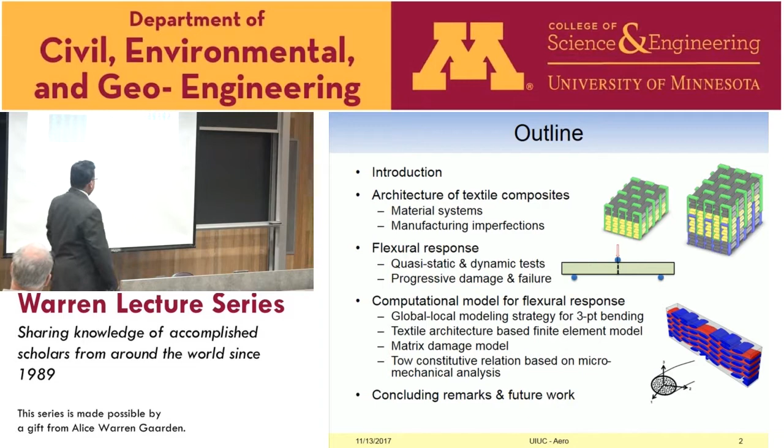These materials have architecture. What I mean by that is that you have length scales varying from meters, which are structural level, all the way down to microns, which are at the microstructure level. So here's just a little snapshot of braided composites - how they're built. They're also manufactured in an automated manner, robotically. So that's another advantage, right? The manufacturing process is more controlled in terms of getting a product that has more precision in the microstructure, the control of it.

So you have yarns that are interwoven in some manner, which you can control depending on the machine you use. And then they are infused with resin under a vacuum, and you get a product which is a structure then. It has the ability to also be manufactured into net shapes. So the shapes that I showed you in the earlier pictures are facilitated by the production of the material as well. So there's some advantages, no connections, etc.

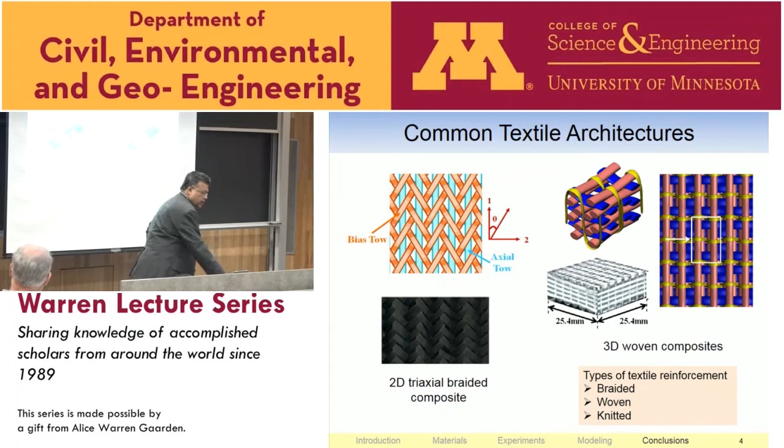And it's an old technology, right? Weaving is one of the oldest technologies. Our jackets, Nike shoes - they're all woven and they're mechanized. So with a bit of imagination and creativity, if you can make a shoe that's size 10, you can make a shoe that's size 100. And so you start thinking of scaling things up, and you can make very large structures quickly. And so as mechanicians, we now have to come up with frameworks to analyze the structure to be able to predict how such a structure would behave.

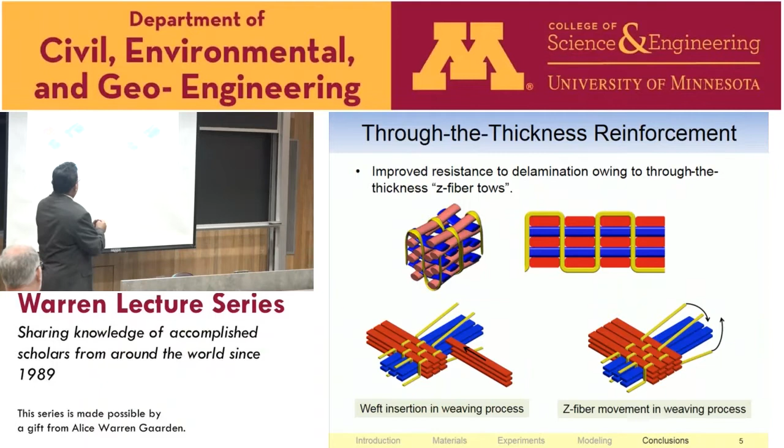So it's a weaving process that I'm showing here as an illustration. And the yarns can be different - you can have glass, Kevlar, carbon. Some are now thinking about ceramics like silicon carbides, etc. as well. And the architecture is controllable.

In this particular type of material, there are yarns that are in plane, if it's a panel, and then there are yarns going out of plane. That's the zigzag, somewhat crushed sinusoidal wave going through, binding all the in-plane yarns together. If you start breaking this up, you'll see different length scales all the way down to the micron scale, with fibers and polymer in between.

Material scientists are interested in manipulating the microstructure even at a decreasing scale. For example, the interface between the fiber and the matrix can also be manipulated. There's a lot of work going on in material sciences and mechanics looking at decreasing length scales, but the disadvantage is that the computational cost increases. You have very good fidelity, but your cost increases.

So there's a balance. You have to understand which scale to start your calculation and which effect you want to measure. There's a trade-off, but I think as time goes on, we will see a day where we incorporate more and more scales in a single analysis as computing power and computing architectures become better.

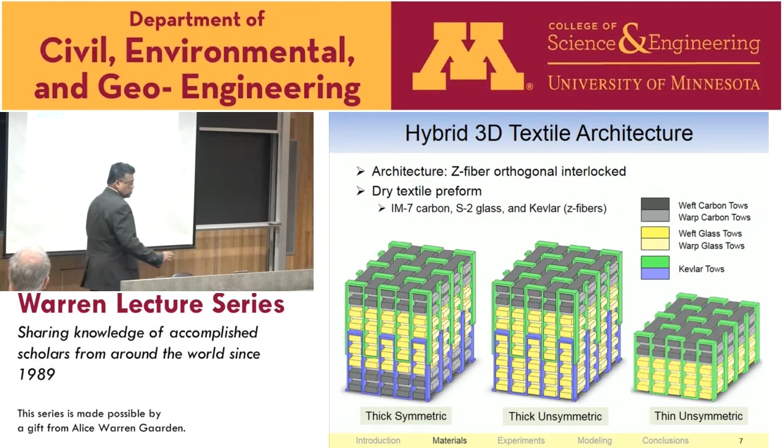This is a depiction of the materials we looked at, and this was for the Army Research Lab. These are the architectures we looked at, very close to the real thing—you'll see in a minute when I show actual pictures. For the particular layer, we changed the number of carbon layers, the number of glass layers, and the number of fibers going through the thickness.

You can see two patterns. You may see in the literature something called a 2.5D composite, not 3D. That means the binder is not going through all the layers if it's a very thick structure—the binder is zigzagging, and there are two sets of binders going through. You'll see in a minute that this actually has an impact on what you predict for the performance.

We take measurements of the microstructure either through scanning electron microscopy, randomly chosen from different parts of the panel, or more recently, there's technology where you can take a micro CT scan of a fairly large structure and convert that to a numerical model. There are companies and software doing that. The medical field is quite advanced in this, where they take an X-ray of a bone and convert it into a numerical model that mechanicians can manipulate and analyze.

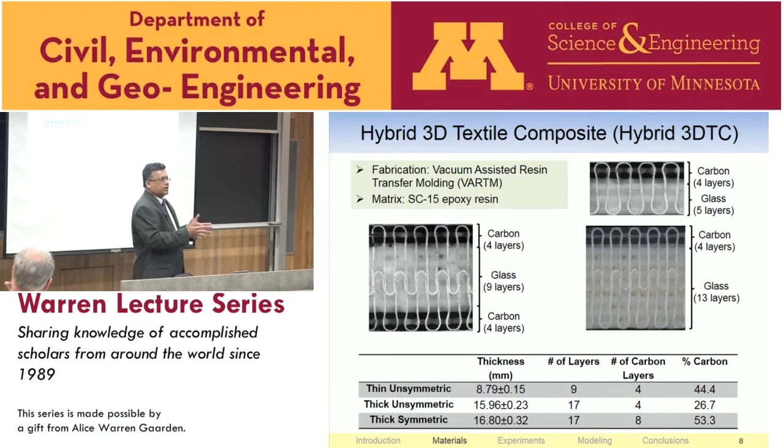That field is evolving as we speak, and the advantages are many, especially for mechanics of materials people—we really want to get a handle on the internal microstructure of the material we're looking at. So let me describe a little bit of the flexural tests, very standard for a civil engineering or mechanics audience.

These are standard 3-point, 4-point bend tests, and the diagnostics are DIC, digital image correlation. We used a configuration that can also look at low strain rates. If you want very high strain rates, we've done that using split Hopkinson bars, but we can also look at the middle range using a drop tower. So the configuration is amenable to looking at both static as well as low to high strain rates.

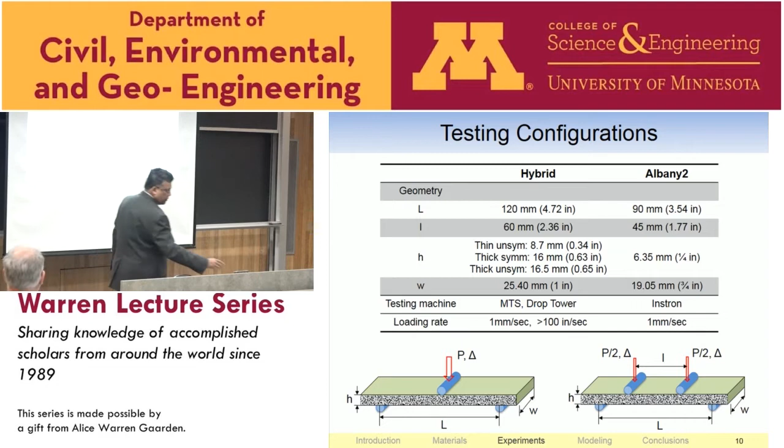Strain rate response—an event at the macroscopic level can have high loading rates, but locally the material may not actually experience the same rates in terms of strain. So you can have low strain, high rate, or high loading where you subject the structure to very high strains but the rates are still low. You have to look at the time scales of the events you're trying to study.

The architectures we tested, we collected a lot of data. We also have another configuration used by the United States Army—Albany is a company that manufactures these for them. Those are undulating structures shown on the right-hand side, where there's no 3D binder layer. The layers themselves are interlocked and binding, so it's still a 3D composite, but there's no third layer holding all the other yarns together.

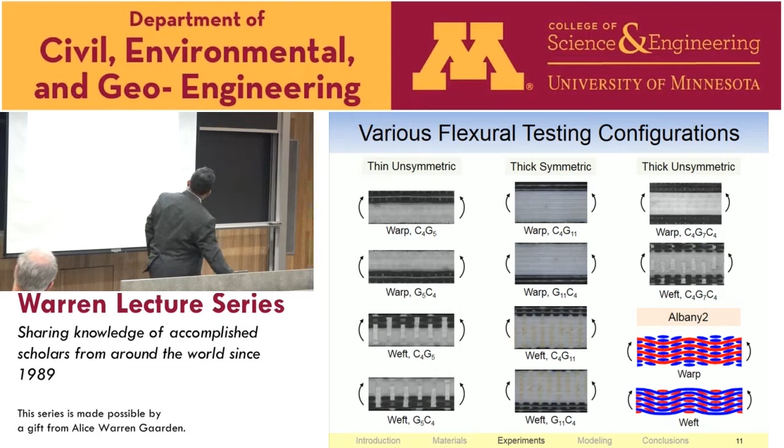What you would want is that plateau region to last for a longer time so that the deceleration pulse does not hit the driver as quickly as possible. Now, let's say the front end of the car was made of diamond. As soon as it hits, the waves transmit very quickly to the driver, and the driver will be ejected out of the windshield. So the point is that you can tailor the structural performance of the front end to impact the head acceleration levels of the occupant in a vehicle.

That you can't do very well with a monolithic material unless you have lots of geometrical control, because geometry can also help us. But if you have material control, material microstructure control, you have the additional advantage that you can design the geometry of the larger structure, but tailor the microstructure as well. So now your design space is much more open, and you can actually dial in exactly how you want that vehicle to collapse.

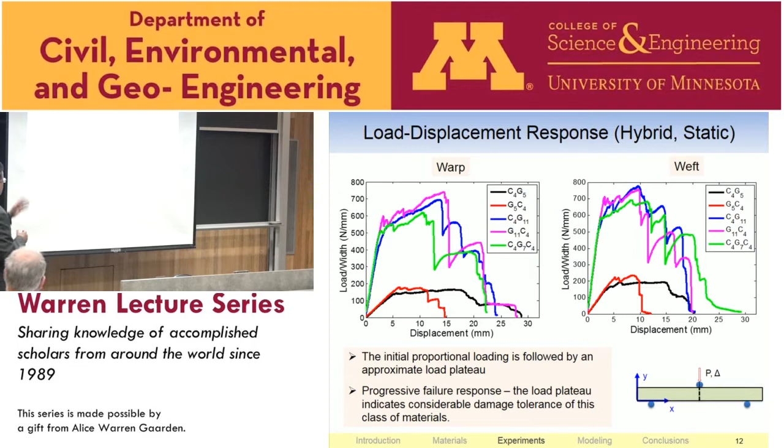This is very attractive for civil engineers as well, when you do bridges, collapsing structures, earthquake-resistant structures, for example. You have your inputs, you have your outputs, you're designing the middle part, which is your structure, but now you're taking advantage of the fact that your microstructure is also tailorable. So that's, in a way, sort of a paradise for people doing mechanics of materials and design. You can affect the behavior quite widely with these materials.

Now, this is the movie we wanted to check. I had a little computer snafu when I came here. Let's see. Okay, let's see, it should run. Nope, it didn't. I'll give it one more try and I'll move on if it doesn't work. No, it's not working. Okay, so what I wanted to show you here was, let's see. All right, so sorry about that.

What I wanted to show you was how the progression of failure develops as we 3-point bend the structure. And then I want to show you one without the speckled images, how it fails. I can describe it: it linearly responds, and the tensile side of the specimen starts to show cracking. But the cracks are not allowed to grow, so they occur, producing some ductility. Then final collapse happens when the top carbon layers fail in kinking.

In the morning, I went to the rock mechanics lab, and I was delighted to see kinking is a version of shear banding in rocks. It's very similar, the mechanics is very similar. And in fiber composites, the important material property that controls this is the nonlinear constitutive model for the matrix material, not the fibers. One would think it's the fibers, but it's not - it's the matrix that controls it. So that's what then leads to that collapse.

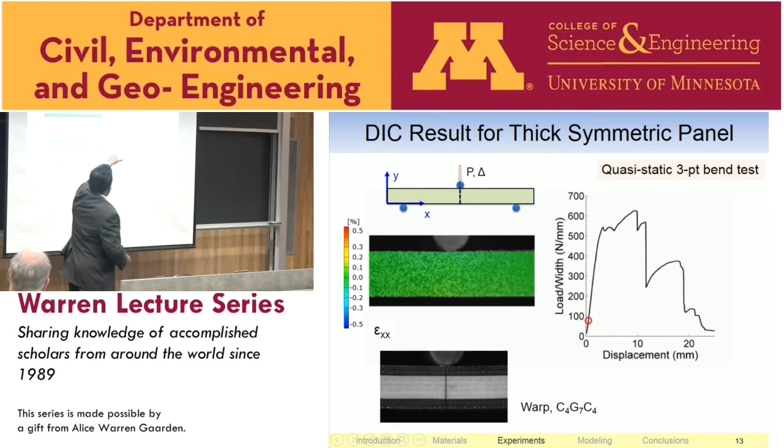And then what happens is that it picks up load again because across the band, loads are still transferred. So the top layer starts to do what I call multiple kink banding. You're making use of the material more - you want the material to crack, but you don't want it to localize and suddenly rip into two pieces. You want that kink band to absorb a lot of energy, but then you want to delay complete collapse by getting it to kink more and more. So progressive kinking - that's what controls that plateau, keeps going forever, adding this ductility.

Now, these are termed quasi-brittle materials. One is a fairly ductile material, the polymer. The other is a very brittle material. But you combine the two and you can come up with a material that behaves almost like a steel, like a metal, yet it's light - very light, 10 times less dense. So your specific strength, your specific stiffness is very, very high. It's very attractive: light, but behaves like a metal.

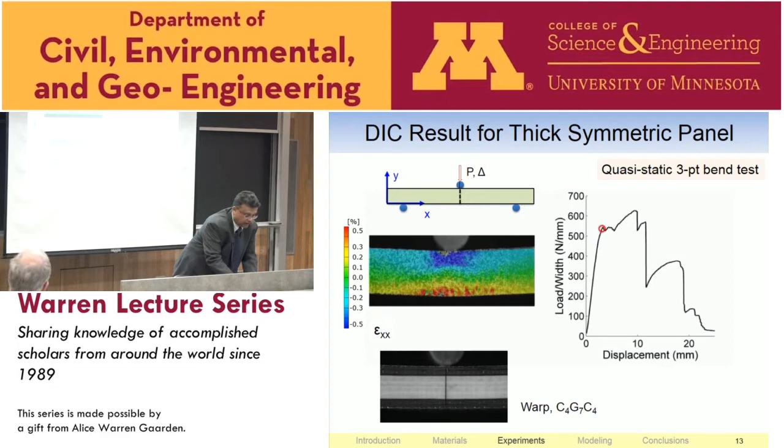So, let's see. Okay, are we stuck, or click out of it? All right, do you know whether... I am? Okay, ah, there you are. All right, that's why he's the chair. All right.

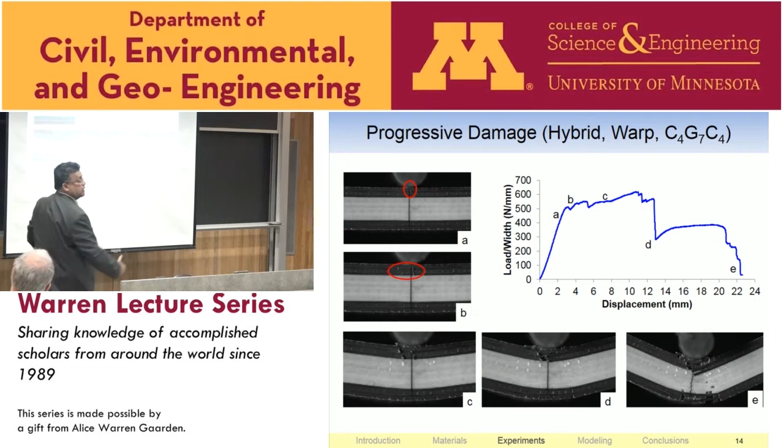Here's another picture showing what I just said in a much broader, more ductile behavior that you get from these brittle materials. By designing the microstructure, you see the failure starting on the top there, compression. That's because the carbon's on the outside and it propagates. This is a thick structure.

Now, after point E, when you unload it, there's a lot of elastic spring back. Unlike a steel structure bent to this level, when you unload it stays - you disrupted the geometry. Here, it's damaging, not a permanent set, so it comes back. But it will not come back exactly because the cracks, the path of reversibility is not exactly satisfied. A crack opens up, and when it comes back, it doesn't come back exactly the same way. That's why there is a little bit of residual damage left in the structure.

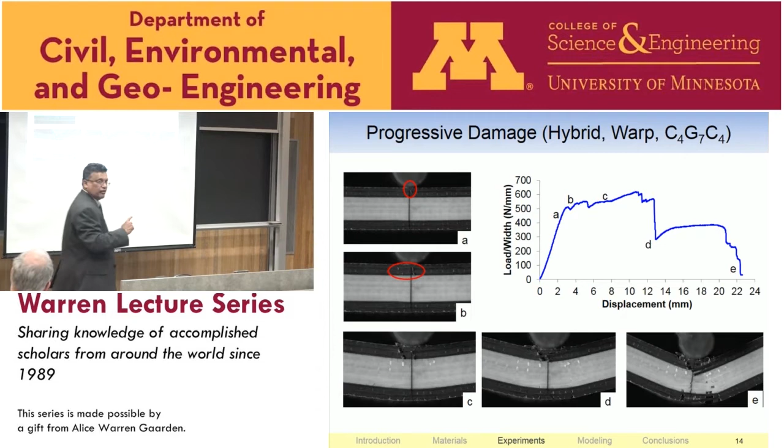What's the scale? We have millimeters on the displacement - in terms of percent. This is about an inch thick structure, a 1 inch thick panel. Yeah, sorry about that, should have put that.

So here are those DIC pictures that we can analyze. You can see that the micro cracking in the matrix sets up at the bottom, and then finally, when it completely collapses at the top, you get those kink bands, and they progress while it's propagating. Now, this is a huge challenge for modeling, right?

So all glory to one of my students that did this work, Dianyun Zhang. She's now a professor at University of Connecticut in mechanical engineering.

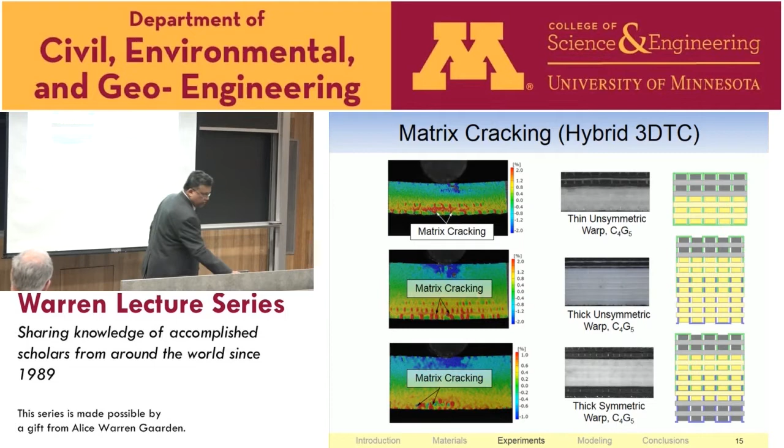So here I'm showing also how the tows, the fiber tows, fail. So this works - you can see that it kinks there, and then if I look closer and closer, you'll see the progressive kinking in those bands, the shear bands that form in those layers, and the bands keep transferring load, and you get another shear band, and another - we call it a kink band, and it continues to grow. But that's good - it's contained, and therefore it's dissipating energy, but in a localized zone.

And so final collapse occurs when the bottom tows in the structure fail in tension, tensile failure in the carbon tows. The kink banding.

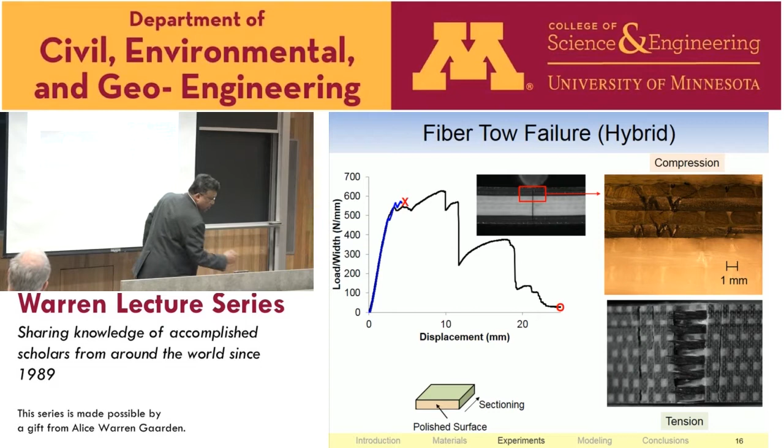There's some nice pictures in Professor Labuz's lab that I just toured in the rock mechanics lab, very similar. The fibers are straight, and then what happens is you get a limit load instability, snap back, in the structural plane, but in the real structure, the unstable equilibrium path is lost. You get a vertical load drop, and you get a kink band, which is a band at a particular angle. At the corners of the band, the fibers actually break because the bending stress, the tensile stress on the fiber on the lateral side is much more, so it snaps. That energy is small compared to the energy dissipated in the shear in the polymer matrix.

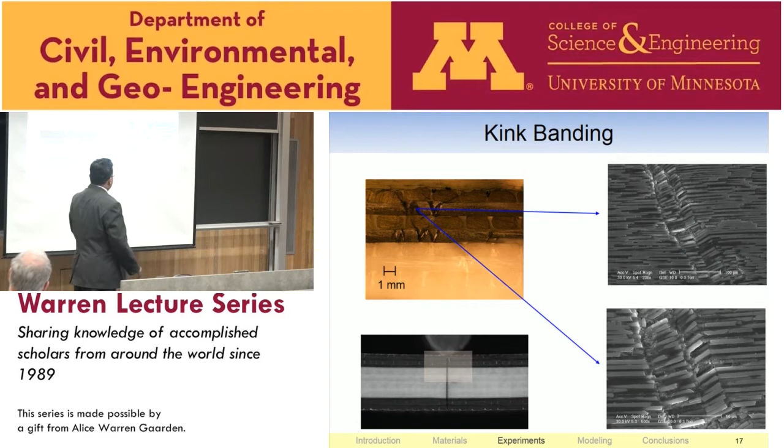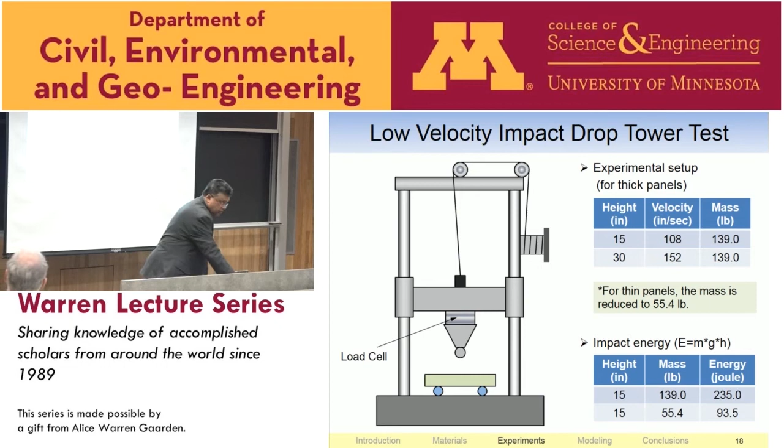We also did some drop weight tests using a drop tower under the same configuration, double rollers to prevent rebound. Some of these results are filtered - the high frequency noise is taken off. You can see that as a function of the loading, you see different behavior. But if the carbon layers are on top, you get a lot of so-called ductility. If the glass is on top, you get abrupt failure. So microstructure will influence how your structure is going to behave, and they may not be the same when you change your loading rate.

More here, and I'm going to explain the oscillations in a minute when we look at the movies again, if I hope they play.

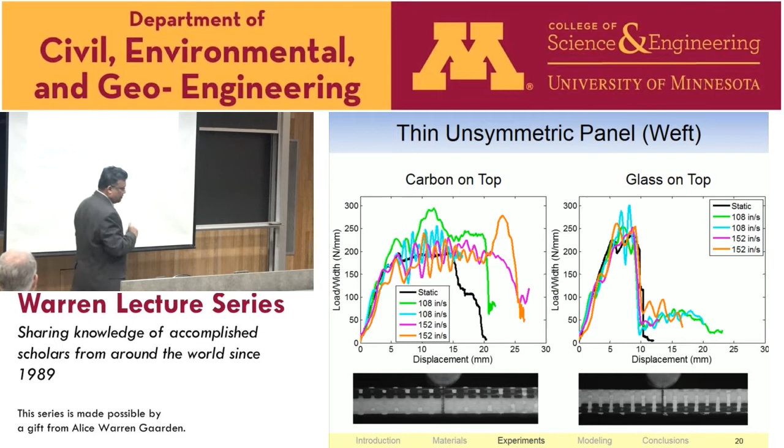There's a movie here, let's see - I have to click this. It's playing, good. So you'll see that these oscillations, after you take out the high frequency noise, is failure. There it is, you can see the failure occurring. Each failure point is an abrupt drop because of the localized failure, but the load picks up. So this is not noise - this is actually a deterministic event which is controlled by the microstructure and the fact that it's contained.

And you can see the glass. So if you design it well, you can make this progressive failure event last even longer, right? That ability exists for you to control what you do with the material - materials design, controlling structural response. And I'm glad this worked because it's great, we've got more movies like this.

So if you look at the other one, where we put - this is an unsymmetric laminate - if you put the glass on top, now you'll see what happens. It starts, and by the way, when this roller is lifted up, there's a lot of elastic energy in the rest of the structure that will lift it back up. It completely disrupts itself because once the bottom tensile layers rupture, it just collapses.

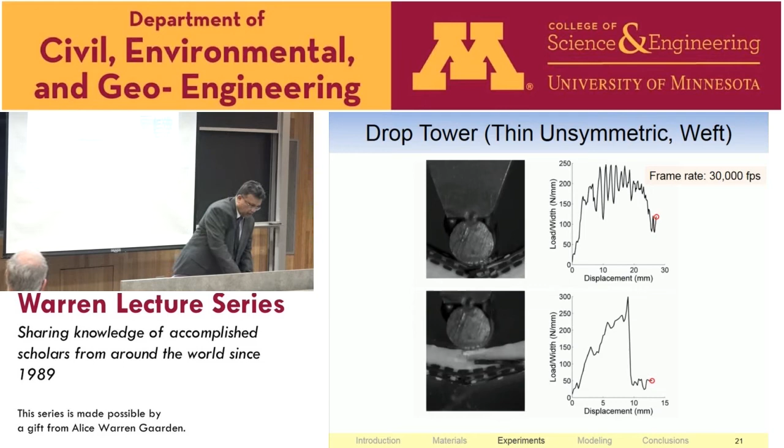So the events are like this. I just captured schematically what happens in these materials. You get a linear response governed by the geometry and the stiffness.

Then you get matrix cracking at the beginning, but still the load's increasing. Then you get the shear band or kink band forming, and the kink band does work progressively. That controls the plateau, and then once you get a total load drop, you get tow rupture on the tensile side of the specimen.

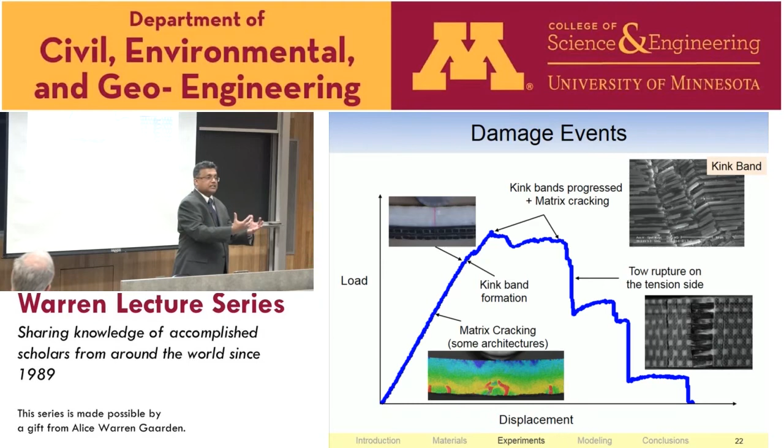So it's compression, tension, shear all in one specimen and one structure. Quite a challenge, because each of these, if you model in isolation, there's lots of detail that you need to include to get the response correctly.

So we had to decide how we're going to develop a hierarchical model that is able to capture those events yet have the fidelity to make it enough to be computationally efficient.

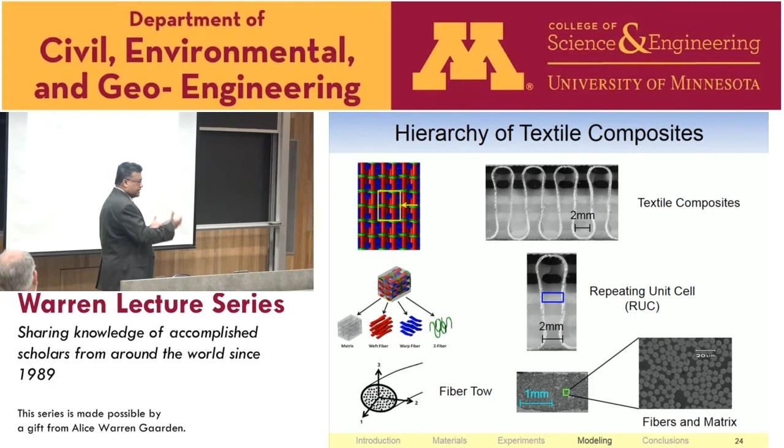We put more and more detail in, and you run out of gas in the sense that you can't really make the computational model run fast enough for you to get an answer in a decent amount of time. So our approach is a multi-scaling approach with a global-local strategy, which is depicted here for this problem.

We are in the process of understanding how we can do it for larger structures. So we looked at the outside region in which there's no failure - we call it basically homogenized layers or homogenized material. In the region where it's failing, we need the details of the microstructure.

But now the question is, what is that region? Well, the size of that region is now an unknown in the problem. And how you find that is you have to run your model until the results converge and do not depend anymore on the size of that region.

Because the size of that region in relation to the size of the structure and the region where you homogenize will actually influence your results. So the unknown is the region in which you have a discrete or more refined scale, or where you do multi-scaling.

So we have the model broken down into different constituents, but more details in this mesoscale model that I'll talk about. And then within that, there is yet another model at a lower subscale to model the tows that have the fibers and the matrix in it.

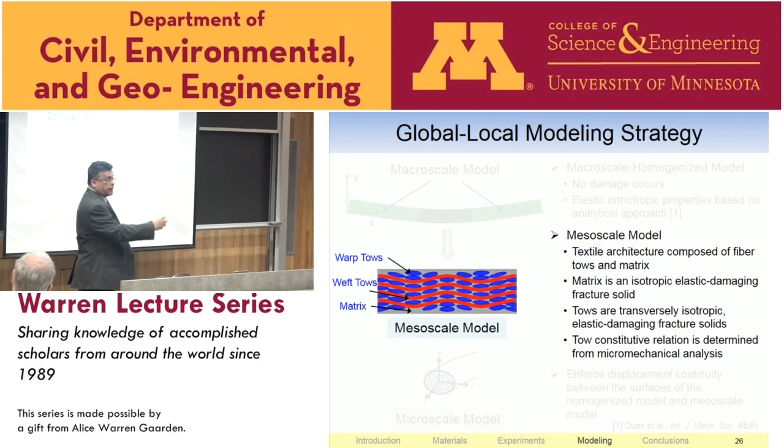All right, so now let's look at the matrix, the polymer itself. For that, there are two models. The first part is a continuum damage theory formulation, because it's micro-cracking - you can't model every crack for the matrix.

And then you run into a sort of a peak, and post-peak you see a drop if you test the matrix by itself. For that, we use something that was originally developed by the concrete community - it's a smeared crack approach, in which we have a decreasing stress with an increasing strain.

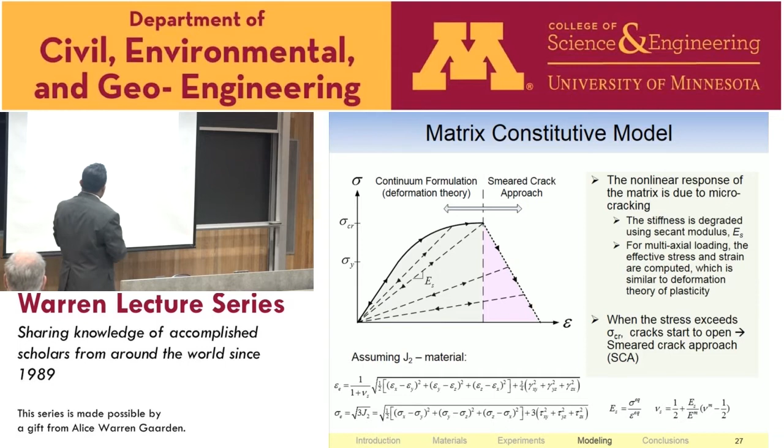And now the question is how you combine them within the same finite element framework. So we assumed it's a damaging material, so the instantaneous properties are the secant moduli and shear moduli, and the Poisson's ratio, which we can get by knowing the equivalent stress and equivalent strain for the material itself.

And then we decompose the strain into two parts, the continuum strain and what we call a crack strain. The crack strain is the strain that acts in the softening region, and the area under the traction separation law, which corresponds to the crack opening displacement, is your fracture toughness or your toughness.

It's not really fracture, it's toughness, because there's also damage in that region. And then when you want to embed this into a finite element scheme, you have to develop a method by which you work out the constitutive model for the matrix.

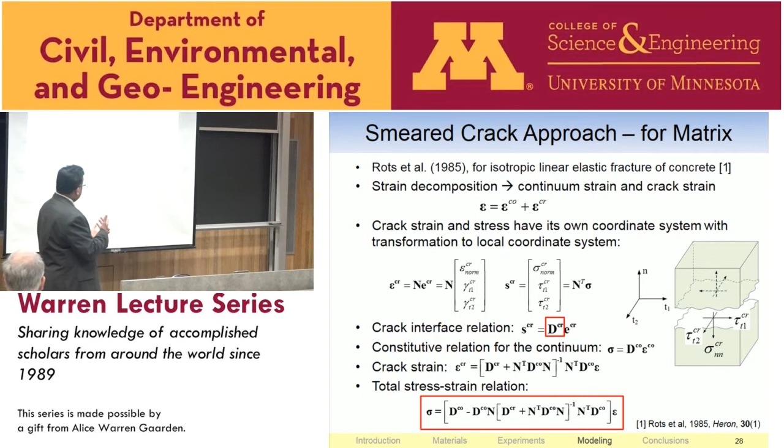Now with that additive decomposition of strain and making sure that you know which plane the crack forms in with the strain transformations, you get that box at the bottom, which includes the continuum part and the crack part. Now for the crack part, you have what is known as the traction law.

It's a diagonal law because the modes are separated, that's how you write. But then growth is mixed mode, which means you need a way to combine when you have mode 1, mode 2, etc. In the pure matrix, it's mode 1 because it's a pure isotropic polymer.

So the cracks will want to grow in a direction where the maximum principal tensile stress is maximized, and the crack forms perpendicular to that. But at an interface, it does not have to be that, because at the interface the direction is fixed, but the growth follows a mixed mode law.

Now why is this important? What I'm saying is that if you don't have the length scales that fit inside one element, which is drawn schematically there, your calculations will be mesh dependent. So when you change the mesh, you'll get different results.

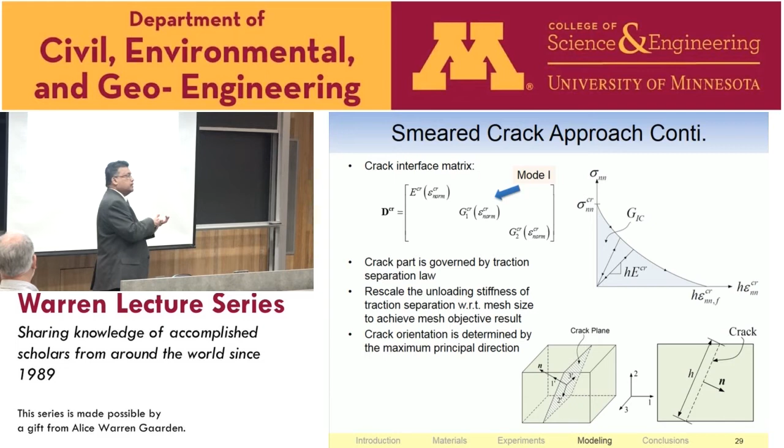Inputs to this model are material properties, but what the finite element code uses inside are not material properties, right? They are a function of the formulation and the material properties. That's how you recover mesh objectivity.

A similar thing occurs in a crack band model that is also used for softening, and there are other models as well, such as gradient models. I learned that one of the pioneers of those gradient models, hierarchical theories, was in this department—Professor Vardoulakis, who unfortunately passed away. He did a lot of work on shear banding in soils, for example.

For the tow, we used a representation called the concentric cylinder model. The nice thing about this is that instead of just using the tow to get the properties, we solve, given the state of strain outside a concentric cylinder, for the state of strain inside the cylinder, in the matrix and in the fiber. Then we use a secant approach to update the stiffness of the matrix, while the fiber remains elastic throughout.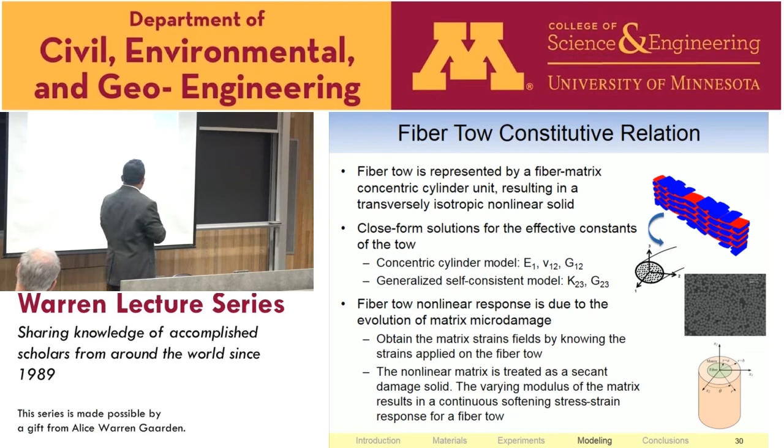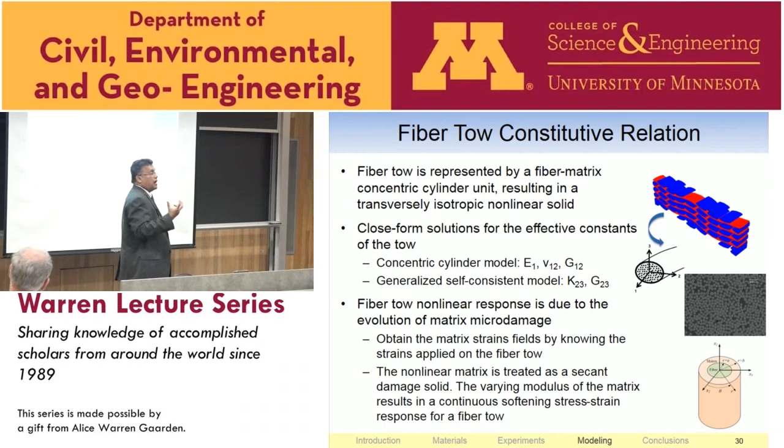The matrix changes based on its equivalent stress law. We use multi-scaling, where at each integration point this cylinder is situated in the tow, so you calculate that. The advantage is that it's not done numerically, it's done analytically—the subscale calculations are analytical, closed form, in a secant sense.

The cylinder model is shown here. This model has been used in the composites literature for a while. What's new is that instead of just using it to find instantaneous properties, we actually solve for the strain and stress fields inside the cylinder. Given the state of strain outside the cylinder, coming from the macroscopic calculation, we solve for the states of strain and stress inside the cylinder.

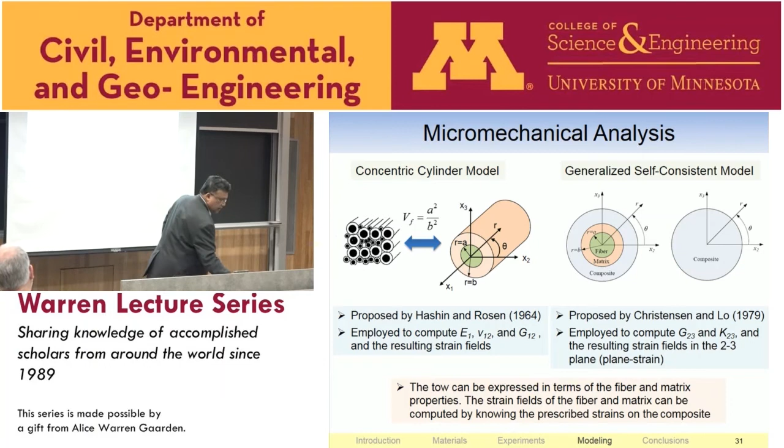We checked it against a full 3D finite element model, and the contours match very well—we get very good agreement with the analytical approach we're taking in a closed form sense. It's MATLAB based; once those equations are set up, it's MATLAB, but then it communicates with the main solver.

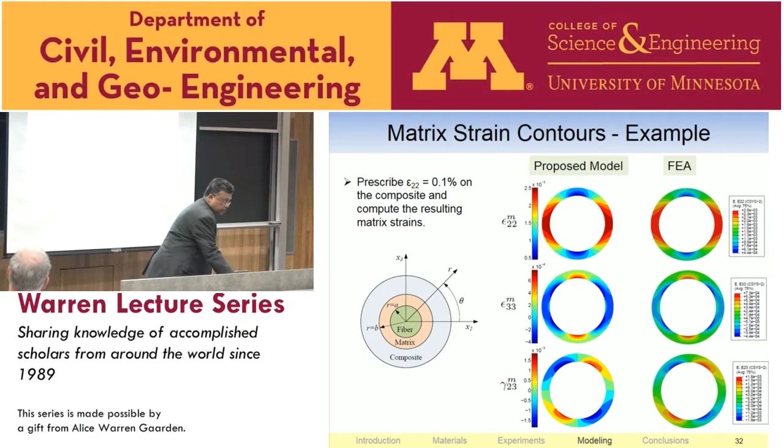In this case we used Abaqus to do the computations. The chart is shown here—we had to use a material subroutine. When we enter, we update the strains, compute the strains in the matrix from the model just described, compute the instantaneous matrix properties, and from that compute the composite properties, now for the tow. Then we pass that to update the stress and exit the user material subroutine.

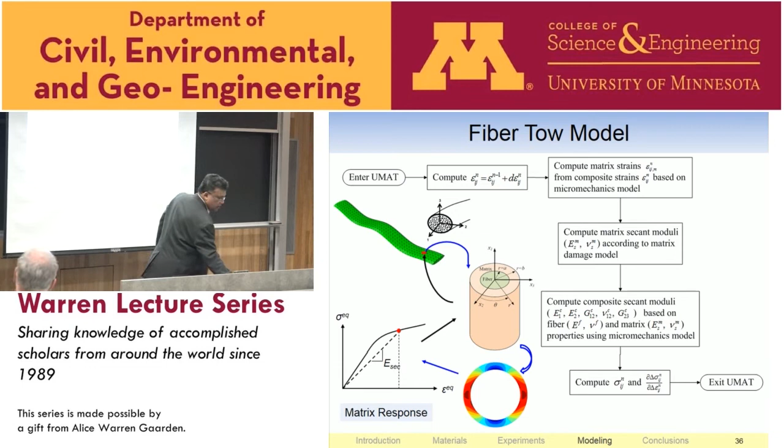How do you evolve the tow nonlinear properties? This morning I had a great, short conversation about triaxiality. The tows inside are not under uniaxial stress, they are under triaxial stress states. In this department there's a great lab that can not only change the triaxiality but also control how much stress in different directions you can put on material—that's a great resource for getting the data we need.

So here we have two quantities, V1 and V2, which are basically the von Mises equivalent strain expressions. But what we found was that the max controls how the equivalent stress and equivalent strain evolve, while the mean actually controls the details of the shear evolution. It's a very interesting observation—we're still trying to understand why, based on the experiments, but it turns out that that's what it is.

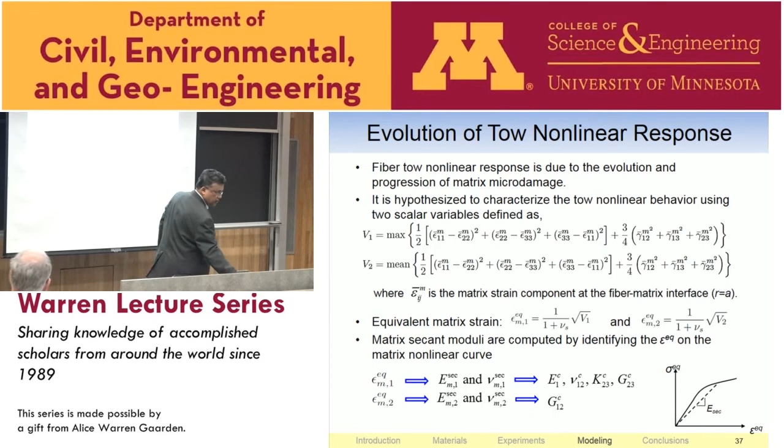So when we do that for a hex pack unit cell, we use our model and a full 3D model. You can see that the nonlinear response is captured very well. The difference is, the full 3D finite element model, if I did finite element within a finite element multi-scaling, it would have taken forever.

But now the subscale calculation is done analytically, so it speeds up your calculations very much. Still multi-scaling.

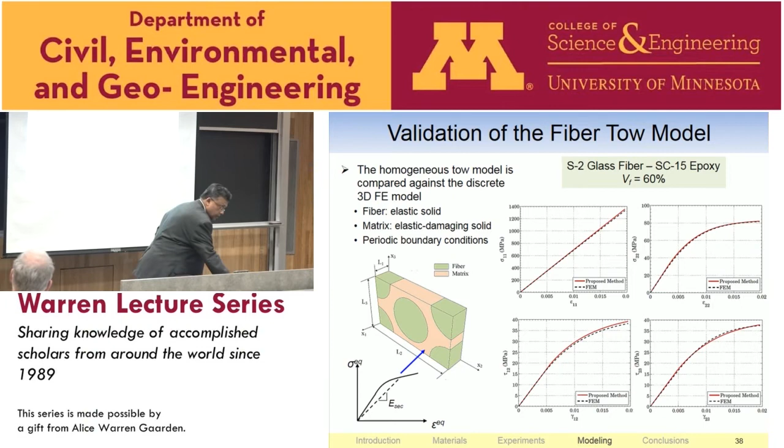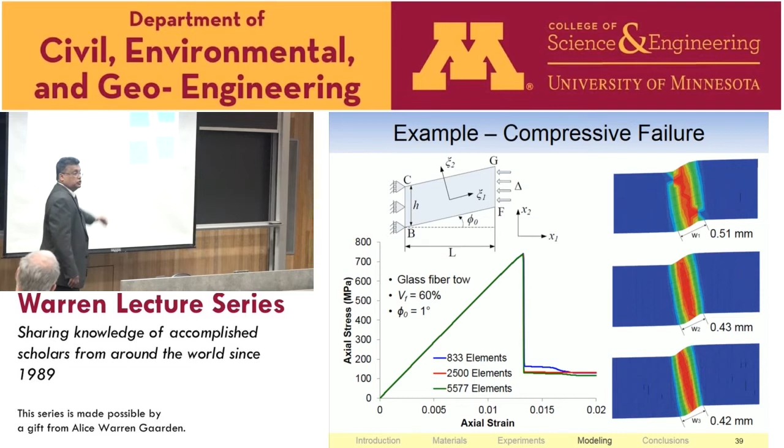This is done in an explicit code. If it was done implicitly, using say a Riks or arc length solver, you know what the curve's going to look like—it's going to snap back, it's going to come back, because those are negative, unstable equilibrium paths. But the important thing is to get the peak and the plateau loads correctly, which this calculation is able to do.

Now these tows are anisotropic, so you have to look at the directions separately—compression and tension, as well as transverse direction failure. In that case you can also have mixed mode evolution, as I pointed out earlier, because the fibers are constraining the crack to occur between certain layers.

Now here I learned something interesting today in the morning, which I will be working on after I get a paper. In the compression, transverse compression direction, I learned there is a modification much better than the classical Mohr-Coulomb, and that's the Paul-Mohr-Coulomb that rock mechanicians use. I was thrilled to learn about that, because there was nice data shown which we would like to incorporate in a model like this. This in compression uses a classical Mohr-Coulomb construction, which can certainly be improved with the data I learned this morning.

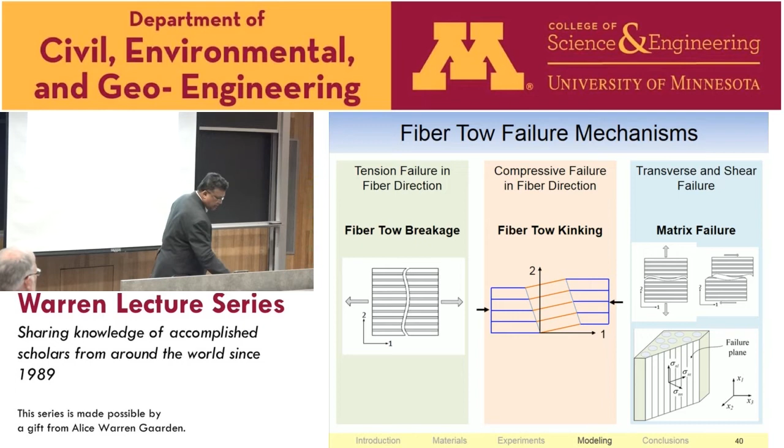All right, so the smeared crack approach for the tow is very much like the matrix, except the directions are now different. So different directions have to be tracked, because the tows are undulating. You need your local coordinate system to keep track of where things are.

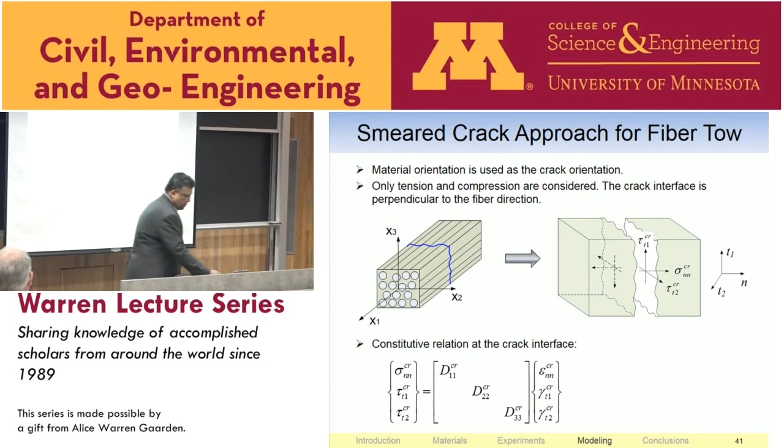Now, furthermore, another important point: when the tows are constrained with surrounding material, you saw that the kinking is progressive, right? A kink band forms, and then load is transmitted and another kink band forms.

You cannot capture that if you drive the traction law to zero, like on the tension side. So when something fails in tension, after complete failure, there's no traction transmitted because there's nothing left. But in compression, when you get a shear band, the tractions are still transmitted, so the confinement plateaus out the post-peak strength, which we get from the micromechanics computations.

So the stress drops—you saw that unstable drop, energy is dissipated, but then you get a plateau. If you don't use that, initially we couldn't capture the progressive failure. So in compression, there's nothing really called a toughness. If it's confined, the toughness keeps growing because there's progressive failure in the tow. So you have residual strength carrying capability of the tow because of confinement.

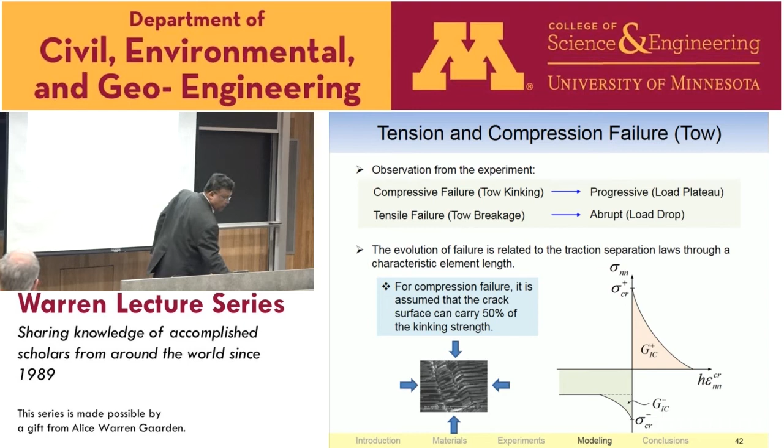Here are the details of the model that we did. A typical model would include the elastic properties plus all those parameters. We used Abaqus implicit and explicit, and you'll see calculations where we make sure our implicit and explicit codes agree, since there's no guarantee on the explicit side.

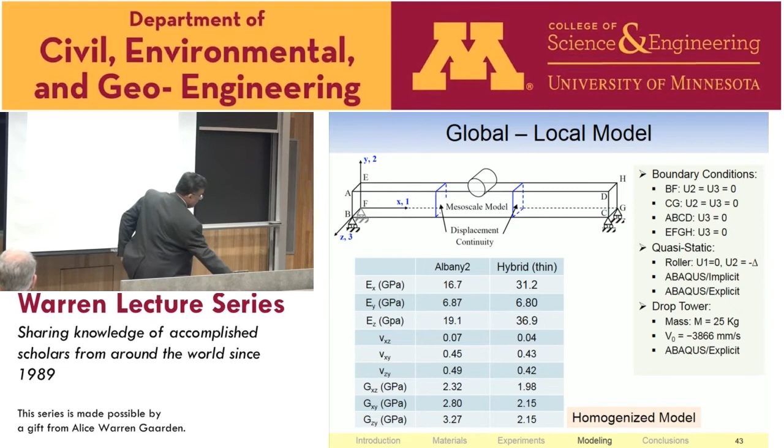I want to show some results of some of the experiments and the FEA explicit and FEA implicit. These are the properties we measured, some of them, and we have some from the manufacturer. So I want to show some results that we got.

Our results are able to capture the progressive kinking that occurs on the top side when we put glass on the top and carbon at the bottom. You can see those red marks are the kink bands that form on the homogenized scale.

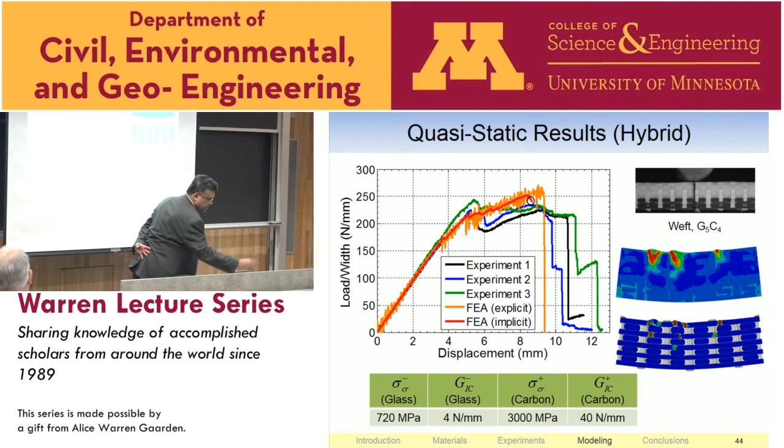These are the results we get from the FEA explicit and implicit analysis. It's not bad, it could be improved. There are improvements we're thinking about, adding more features. I want to remove the matrix to show you what happens as we progress.

You can see a first kink band forms just like in the experiment on the compression side first, then you see the kinks multiplicating, more and more kinking occurs as load increases. There's no abrupt failure, the load keeps increasing, until there's sufficient kinking and the bottom side starts to fail in tension, where the tows rupture on the tension side. These are the tows only.

Now, while this is going on, I removed the matrix. The matrix is cracking at the bottom, the matrix elements. I removed it to show that the tows actually control the global collapse, but the progression of failure in the tows is controlled by the matrix. So it's a progressive failure with interaction between the constituents.

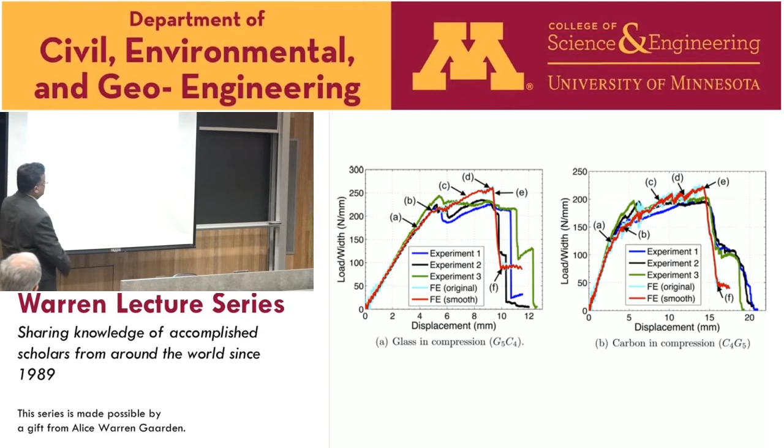What Dianyun calls FE original and FE smooth are the filtrations she did when she did the dynamic experiments. You can see that when we change the glass on top and the carbon on top, the histories change and you see different behaviors. It's more dramatic in the next chart, where glass is on top, carbon on the bottom, and on the right-hand side, carbon on top and glass on the bottom.

You get progressive kinking much higher in the carbon-on-top, glass-on-bottom specimens compared to the reverse, a larger energy absorption or energy dissipation. Final failure occurs with tensile rupture of the tows. Carbon tensile rupture occurs much easier, glass not as easily. So the bottom line is you can design the architecture.

This model is showing that it can capture the events of the experiments we conducted, which gives us confidence now to start messing around with the architecture, to see if changing different layers and different architectures controls my overall stiffness and the progression of failure.

Now, impact loading is something we are doing right now, so I want to change gears a little bit here. We used the same model for tensile loading of a slightly different architecture. Again, we have the same different scales, but here we did something slightly different.

We used a software called Simpleware. It's a company that allows us to take very high-resolution micro-CT images of the entire coupon. I first discovered it in the dental school at Michigan, then I went to Washington and found that the medical school there also uses rat models to develop certain

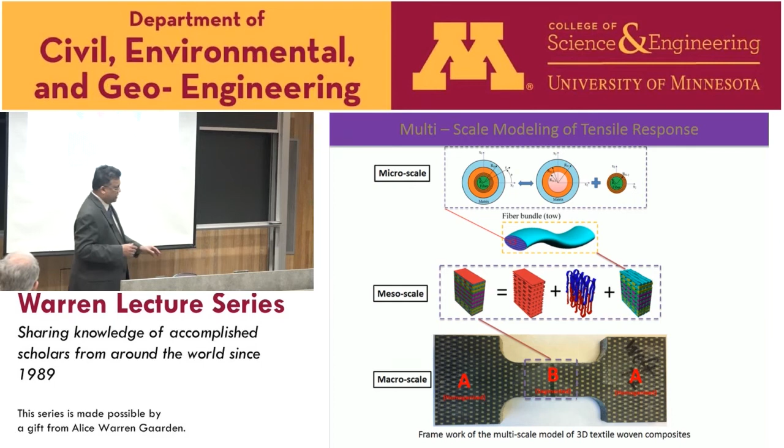tissue growth mechanism studies. They can take a rat, anesthetize it, and get a resolution of the entire rat down to microns. When I came to Washington, the civil engineering department owns a very large SkyScan CT machine, which I'll show in the next slide, which has the ability to... sorry, in the slide after that.

So the modeling was similar, but this time I modeled the entire coupon in the B area using this SkyScan image processing tool. What it does is image the entire specimen, and then it writes an interface from which you can generate a very detailed finite element model.

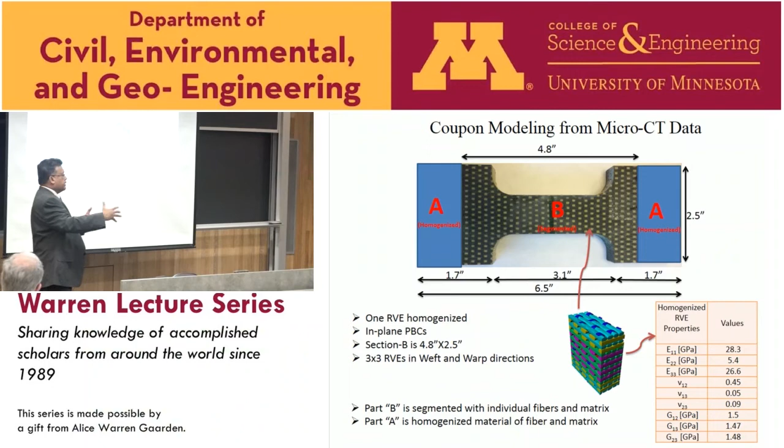That's the details of the machine we used. Civil engineering did that because they have large specimens where they want highly detailed microstructural information to look at progressive failure in concrete specimens, where they're changing the mixtures, the particulates they add, the fibers they add, etc. And so they want to do more refined models to understand how those models can be improved.

So we used that machine and were able to get very, very high resolution images of these composites. Now, we're not able to get individual fibers, but we're close - getting to within 9 micron pixel sizes, while still imaging a fairly large object. That's very appealing to me, and I'm told the company is now developing an even higher resolution machine. These are expensive, and we were lucky.

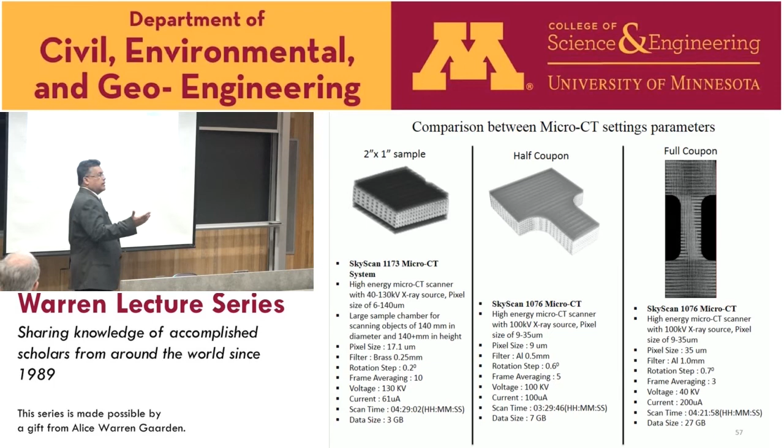Civil engineering at Washington wrote an NSF major research equipment grant, and the machine cost $750,000. I'm told the next one is of the same order, a little bit more expensive.

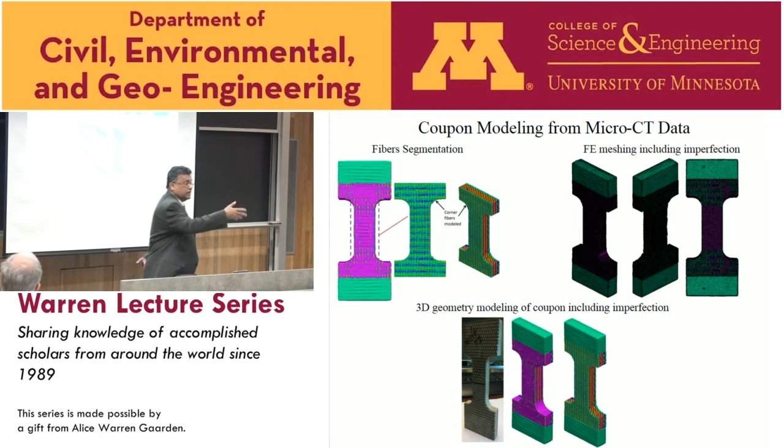So we scanned half the coupon, then flipped it, mirror imaged about the top. So the coupon's modeled symmetrically, but the properties are slightly perturbed so one side has slightly different properties than the other. We know that in a real specimen, if we measured the properties, they wouldn't be exact, they'd be more random. So we put in a very slight, 1%, perturbation so that if it fails on one side, it's just like what we see in the experiment. And that's what we get with a very large model.

Now what I'm showing here is what we actually see in tension. This coupon fails like that, and that's the black curve there. Then after that the load drops.

So we did RVE studies. We took representative volume elements, and we did a perfect RVE, an imperfect RVE that was scanned and constructed more accurately, and then a 9-RVE model, because remember, in damage and failure, the notion of an RVE is not just the geometric representative volume element, it's the physics representative volume element. Is your volume element able to capture the mechanisms you want to capture? If you do it just based on geometry, you'll miss the boat, because that's just a geometrical representation. Physics, especially when there's localization, requires the correct number of RVEs to capture that mechanics.

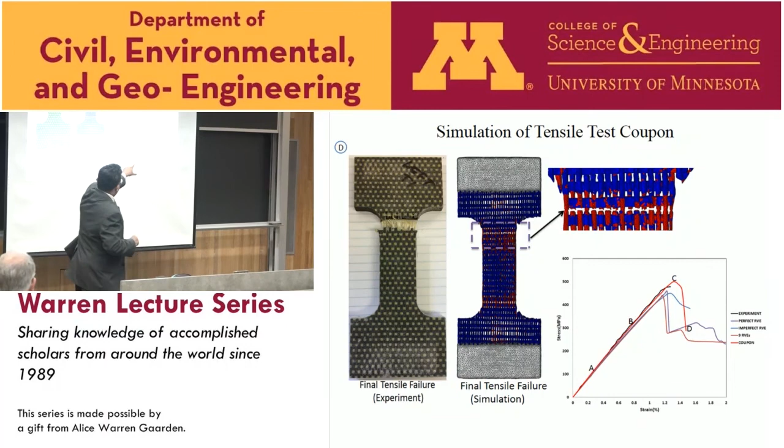So that's the middle three. The entire coupon simulation is that other red curve. You can see it does a fairly good job of capturing what we saw in the tensile test.

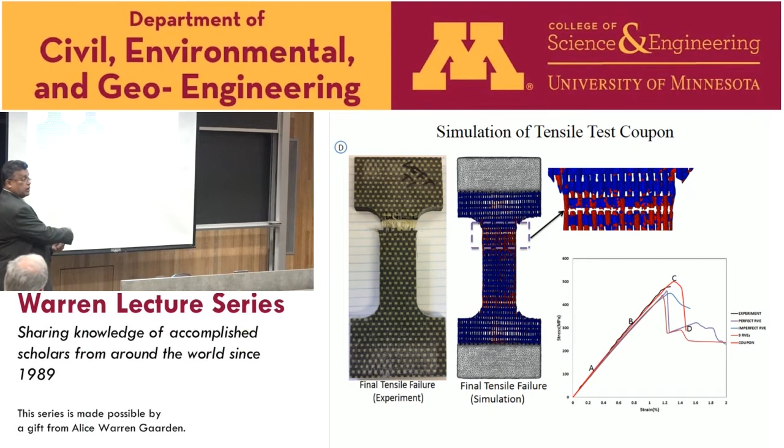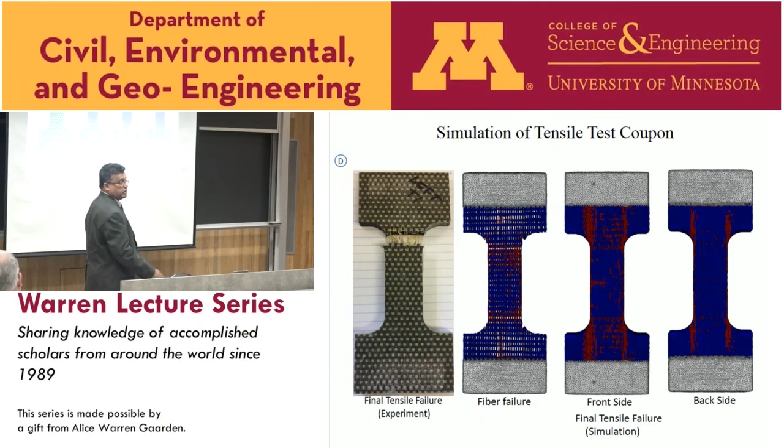Those are the tows that I isolated to show how the failure occurs in the tows, just the front side and back side. The red now is the matrix cracking. I'm showing the whole thing here, whereas earlier I showed just the tows with the matrix elements removed for visualization purposes.

Here I just show how the progression occurs, and it's actually quite remarkable. It's not exact, obviously, because the specimen itself isn't exact, but it has the features we actually see in an experiment as well with DIC. We see the matrix cracking, and then we see that rupture event.

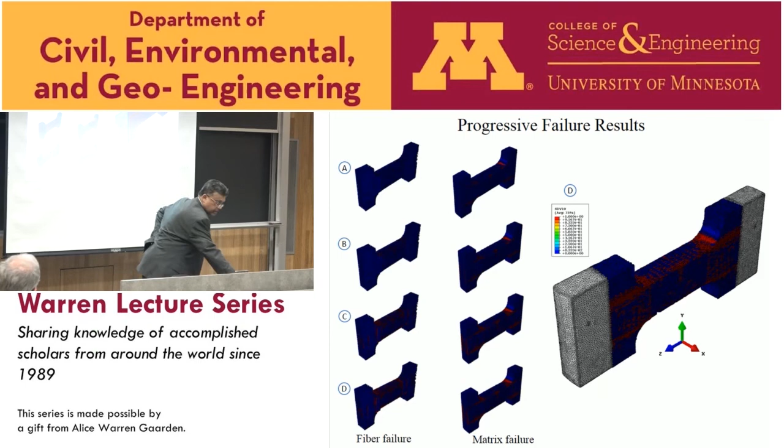We've done lots of tests with this material as well. So what I've really described here is that, depending on the scale and what you want to get, mechanics can be used carefully with details at different scales appropriately chosen to provide a computational framework that can be used for these types of composites.

Now, I showed what I'd call a direct numerical simulation, the large one, where you can take an image, convert that to a mesh, do the entire microstructure, and those results are in fairly good agreement with a macroscopic response, in agreement with an experiment, showing the progression and failure as well.

The advantage of this is it allows fairly sophisticated calculations to be done ahead of time. If you did this with tests, for the system I showed you, it would take a long time, and it'd be very trial-and-error based because you're combining different materials. That's exactly what the Boeing company learned when they built the 787 as an all-composite aircraft. They realized the Edisonian approach of testing everything to get data wasn't going to work. So this idea of using a computational framework for modeling is now pervasive in the aerospace community.

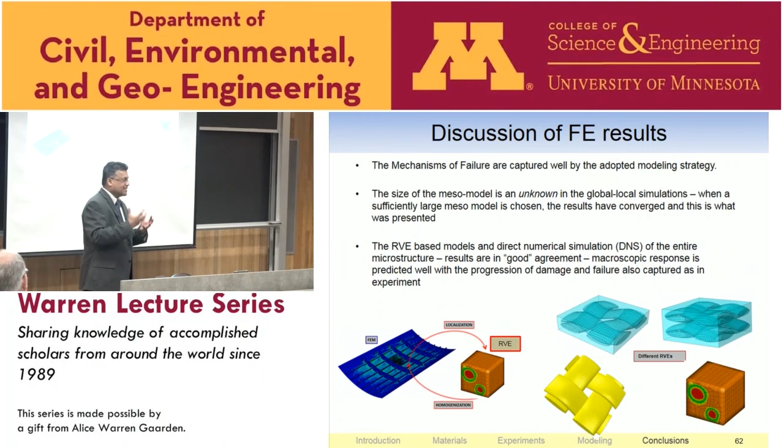NASA has come out with what's known as the NASA 2040 vision. It's a great document. I know this is maybe a civil engineering audience, but they should read it because there's lots of mechanics in it, mechanics to influence how airplanes are designed, where simulation and tests are brought together in the certification of a plane that carries passengers. So for young people here, it's a great time to be in the field of mechanics, because I think you'll see more and more computational developments with richness in the scales we can model coming into the picture. It's a great time to actually be in mechanics.

So I offer my concluding remarks on what we did today, what I presented. But obviously there's more to be done. Just by talking to two people in your department this morning, I learned quite a bit that I can apply to these models here itself.